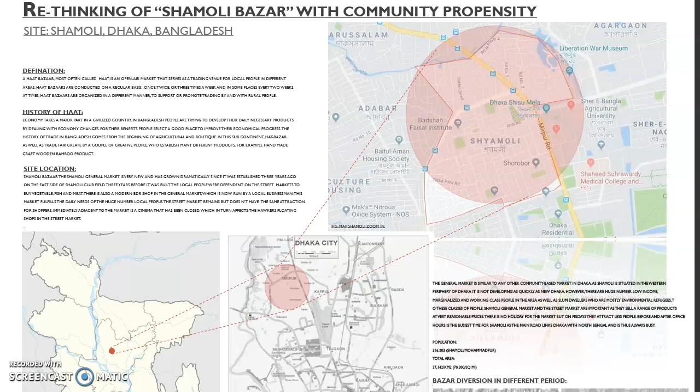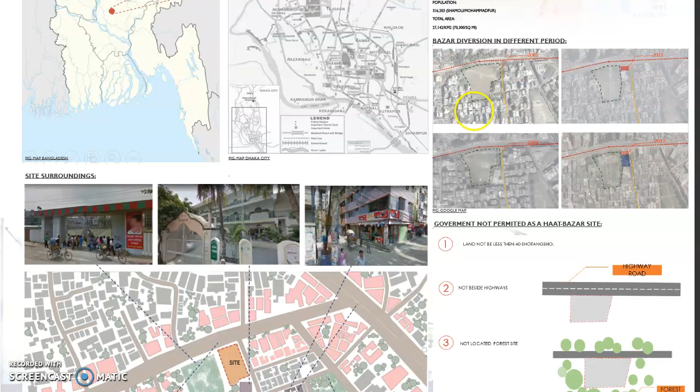Here is the different diversion over a period of time, how my site looked like from 2001 to 2018. And here is my site.

There is a big field just near my site, so I also work with the field as well in my site.

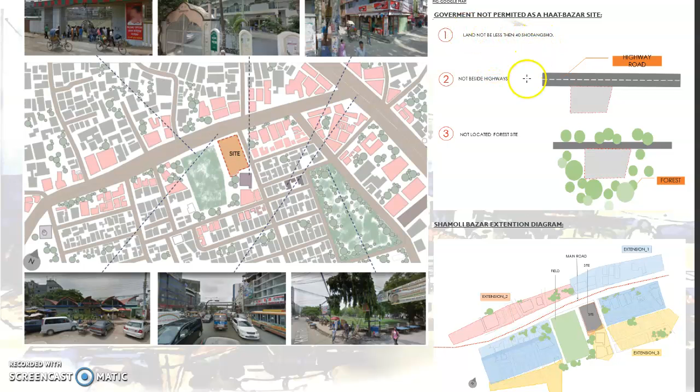This is the government restriction for the haat bazar, which I have to follow in my design as well.

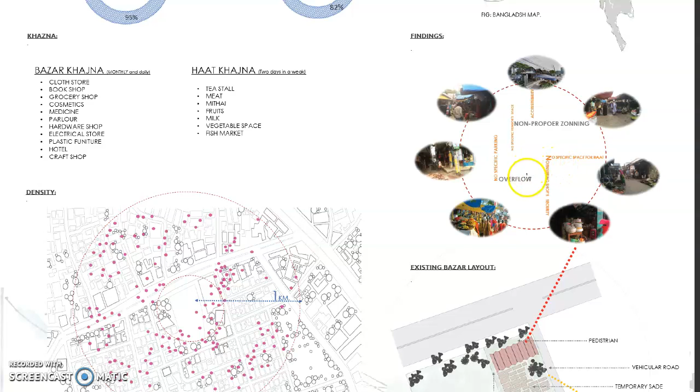So I just tried to figure out all those issues and work on that in my design. This is the existing bazar layout, how it looks like nowadays, and the transportation systems as well.

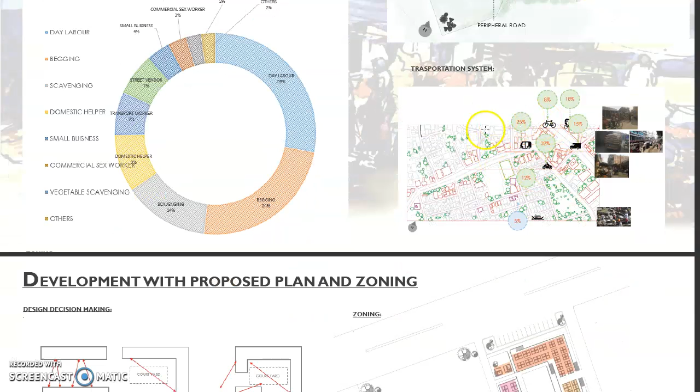Here I'm going to talk about my proposed plan and zoning. I started to work on a rectangle so that I can make a courtyard space, because as I'm talking about a bazar, a lot of people gather together.

So I tried to make a courtyard space so that at a certain period of time, all the people can come together. They can roam around the bazar market, and they can get good circulation as well.

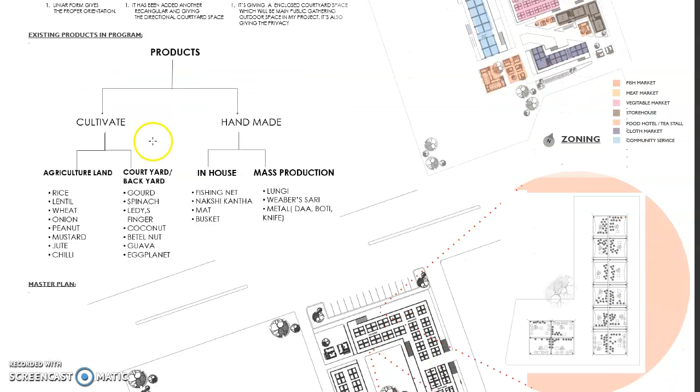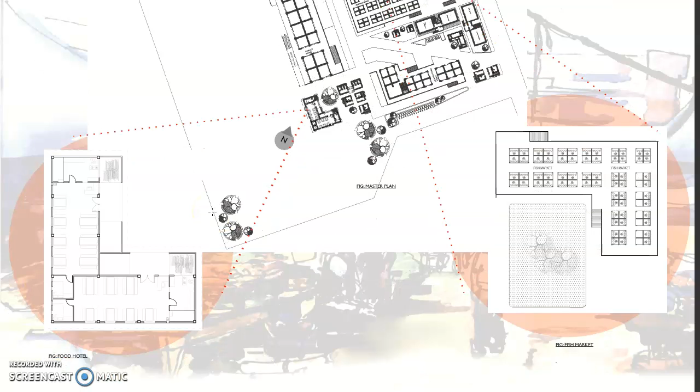Here is the product, which product I found from the bazar, so that it makes it easier to work on my design. And here is my master plan, where I also provide some block plans to make it easier to understand how I'm thinking to design the project.

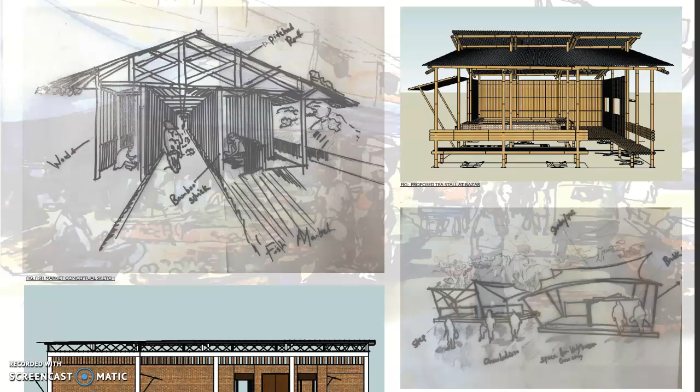Here are also some conceptual drawings which I tried initially, showing how I'm going to work with my project, as I'm thinking to implement local materials as well. Because what happens in the bazar is the shopkeepers couldn't afford a lot of money for their stall, so they have to pay a certain amount of money on a weekly basis, so that it becomes easier for them to get a shop and sit there to sell their products.

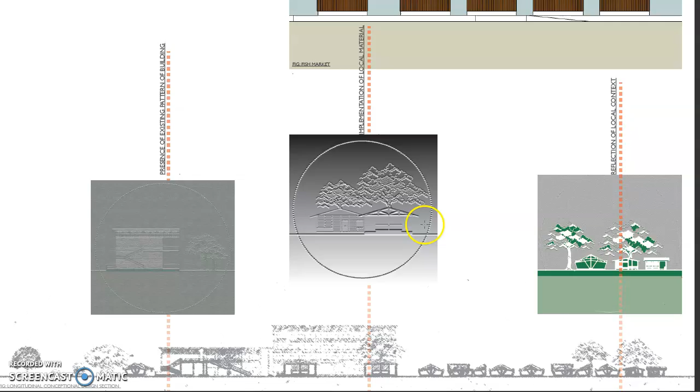So here I also tried to do some sections, some blow-ups, some elevations, which made it easier for me to work on my design. Thank you.